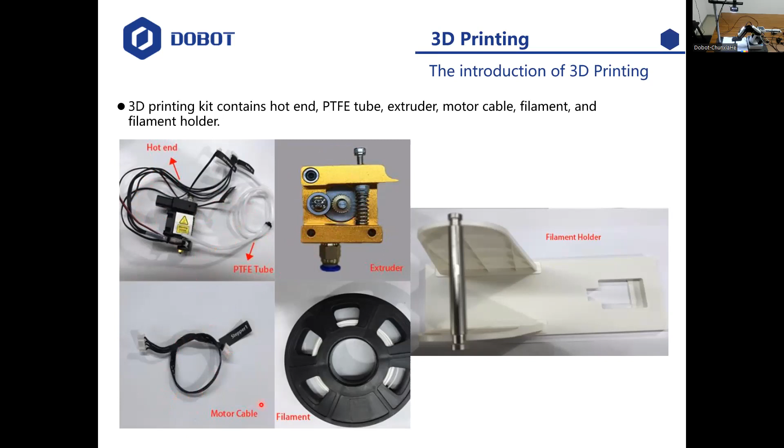This is the Hotend, and this is the PTFE tube, and this is the extruder and motor cable and filament, and this is a filament holder.

Then connect the end of the PTFE tube to the Hotend and push it down to the bottom of the Hotend, then connect the other end to the extruder.

Okay, and step 3 is to insert the filament into the PTFE tube and push it down to the bottom of the Hotend. So we can know this white cable is the PTFE tube, and this one is the Hotend.

And then to fix the Hotend on the Magician with the clamp fixing screw, and then insert the heating cable to interface 4, and the fan cable to interface 5, and the thermistor cable to interface 6.

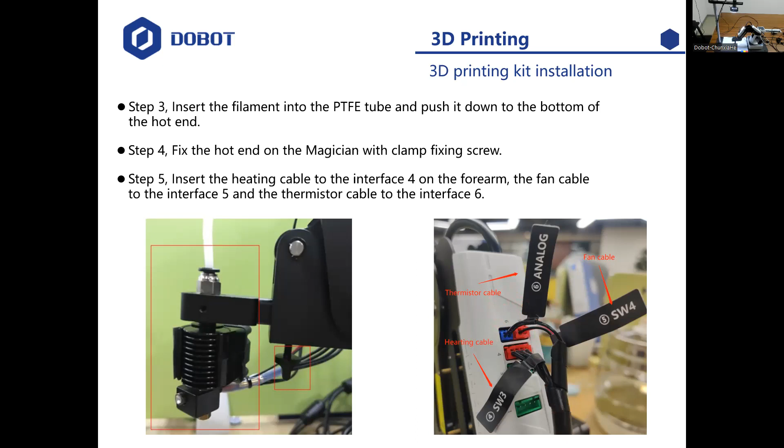Okay, and step 6 is to connect the extruder to the Stepper1 interface on the back of the base with the motor cable, then place the filament and extruder onto the filament holder. So we can know this is the filament holder and this is the extruder.

Okay, so next I will show you how to operate the software. This is the main page of DobotLab. In this page, users need to click the 3D printing lab.

When the user enters the 3D printing lab, they will see the following pop-up windows. Here are two suggestions: if you haven't yet burnt the 3D printing firmware, you need to click Onboard, and then select the device and port on the firmware upgrade page.

Then click Connect. After selecting the firmware type, click start to upgrade. But if the 3D printer firmware has already been burnt, you can directly open the 3D printing software to use it.

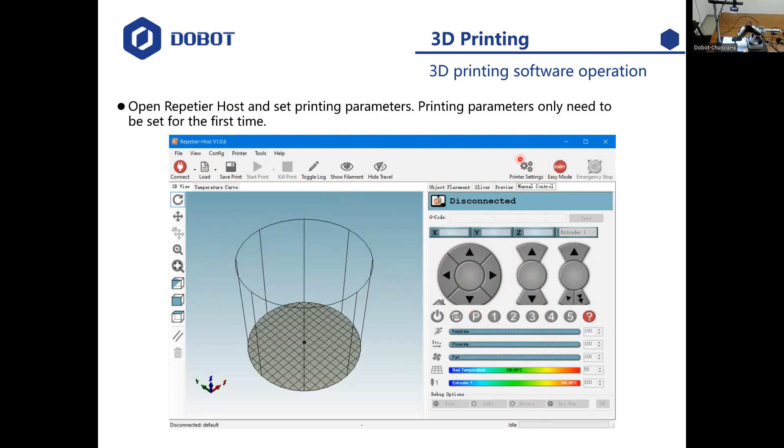Okay, and on this page, you need to unselect the options: disable motors after job/kill, go to park position after job/kill, and printer has SD card. Other values are set by default, so you don't need to change them.

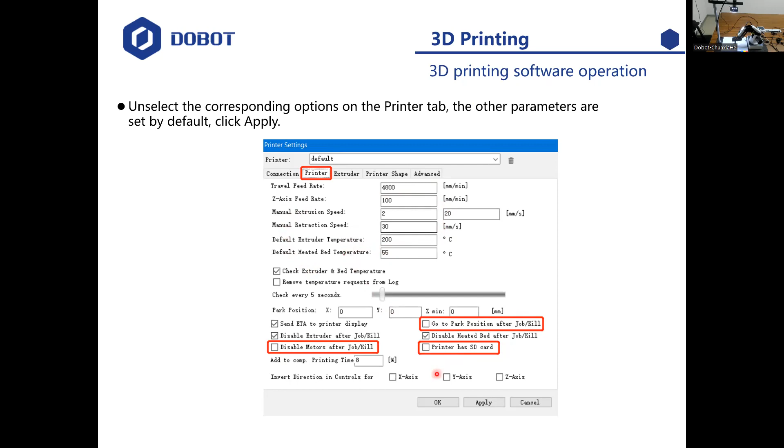So then apply and go to the next page. This is the extruder tab, and in this page you just need to set the diameter and then click apply.

Okay, and this is the printer setup page. You can set the printer type, the X, Y, Z axis, print radius, and the height. When you finish setting all the parameters, you need to click Apply and OK.

After setting the parameters, let's go back to the Repetier-Host page. Here you need to connect the Repetier-Host page to the machine by clicking this button. After the connection is successful, the current heating temperature will be shown in this picture.

Before printing, users need to test the extruder to check whether the melted filament flows from the nozzle. The temperature of the extruder will be above 170 degrees Celsius. The machine will not start 3D printing until the filament is in a melted state, so you need to heat the extruder first.

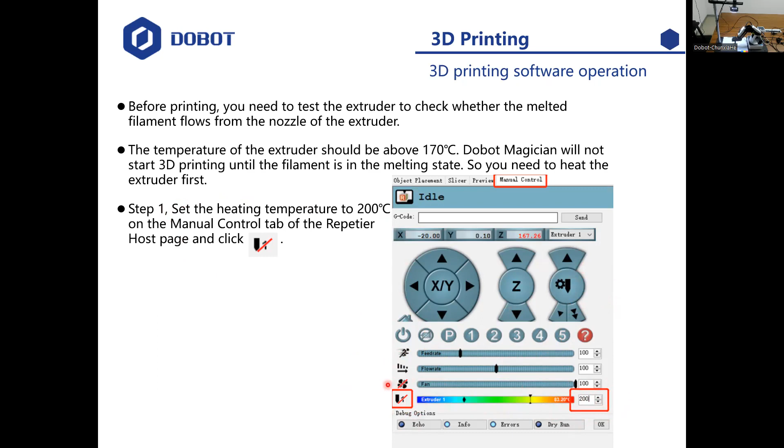Next, I will introduce how to heat the extruder. Step 1 is to set the temperature to 200 degrees Celsius on the manual control tab, then click this icon to start heating. Step 2 is to click the extruder feeder when the heating temperature is up to 200 degrees, and then feed up to 10 to 30 millimeters.

If the melted filament flows from the nozzle, the extruder is working properly.

Next, you need to adjust the printing space and get the printing coordinates. There are two ways to get the printing coordinates. The first is to press the unlock key on the robot arm and drag the robot to make the printing head contact the surface of the masking paper, then release the unlock key.

Then we need to input the command named M415 in the G-code command window and press enter to get the current coordinates. In the other way, you can also press the key button on the back of the base to get the current coordinate.

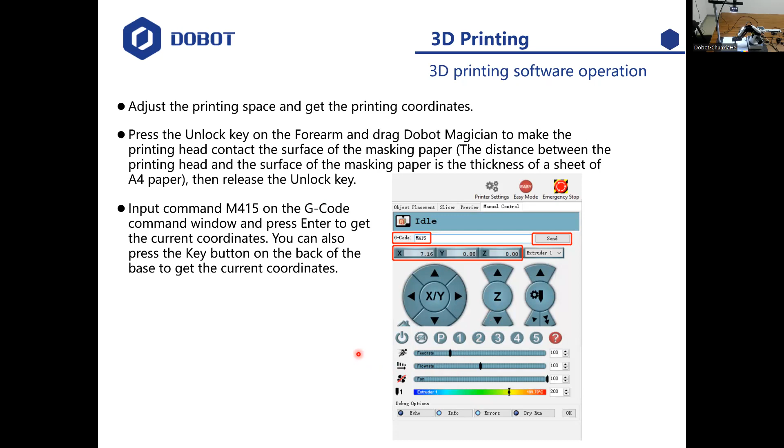If you can't find the G-code command, please click this green one to close the easy mode. The icon changes from green to red, indicating successful closure.

Okay, and then we need to import the prepared 3D printing model you saved on your local file, like this picture.

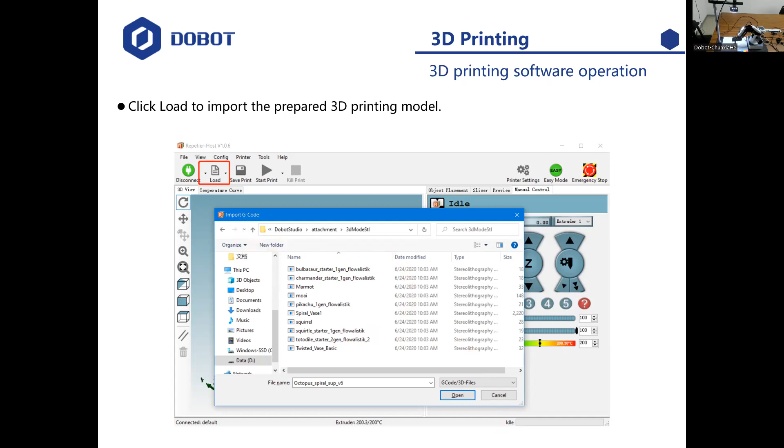After importing the model, you can change the size of the model. For example, you can center, zoom, or rotate the models on the object placement page.

Then we need to set the slicing parameters and the slice style. We can click the Features configuration to set the slicer on this page. When we enter the configuration, we can see this page.

We can see some of the parameters about the slice, and select the slicing parameters on this page. Then we save the printing settings, the filament settings, and the printer settings.

After saving the parameters, just click Slice with CuraEngine on this page to complete the slicing.

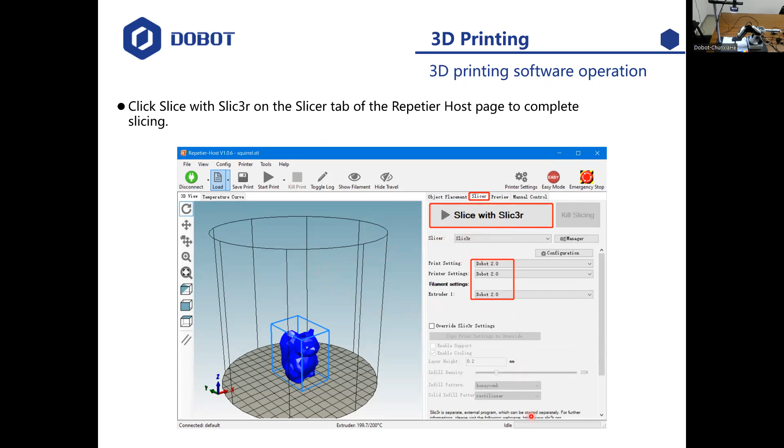Next, I will show you a real demo about the 3D printing. Just hold a moment.

Okay, now sharing a screen about the 3D printing video. Here are some materials for the 3D printing kit.

At first, when we start to prepare the materials, we need to pull the filament down to the bottom of the hole via the pulley.

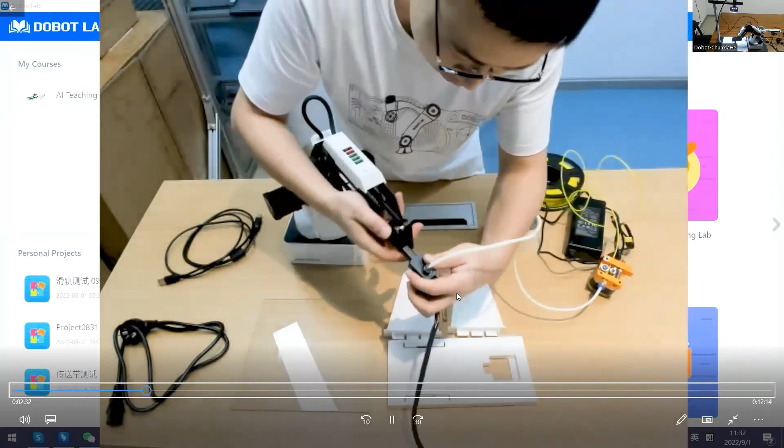Then fix the quadrant in position with the clamp fitting screw.

Then insert the cable into the interface on the robot forearm.

Then place the extruder on the filament holder. But before that, we need to assemble the filament holder like this.

Then we need to connect the extruder to the robot's Stepper 1 interface on the base of the robot.

Then connect the USB to the computer and connect the adapter to the machine.

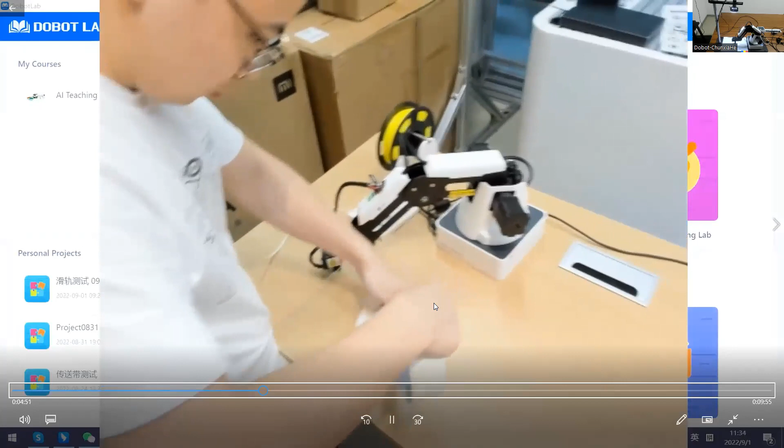Then we need to stick the tabs on the glass, like this movement, because we need to put the 3D printing model on this glass.

Sometimes the firmware upgrading will take a few minutes, so just wait.

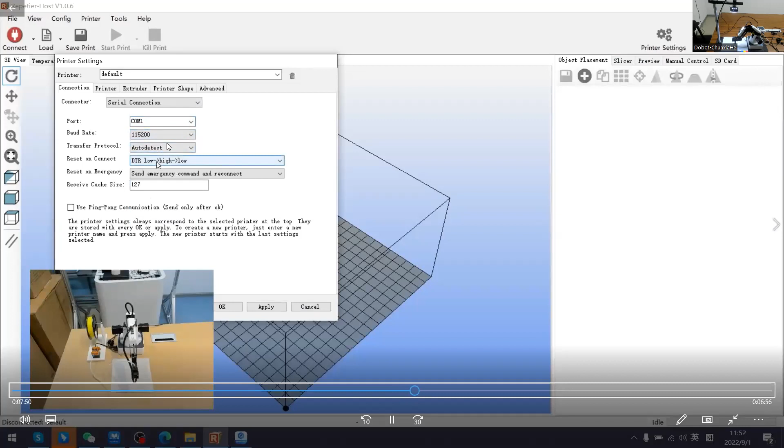In this printer settings page, we just select these 3 options and then go to extruder. In this extruder page, we need to set the diameter. In this page we also set home X, Y, Z axis, and some printing ratios.

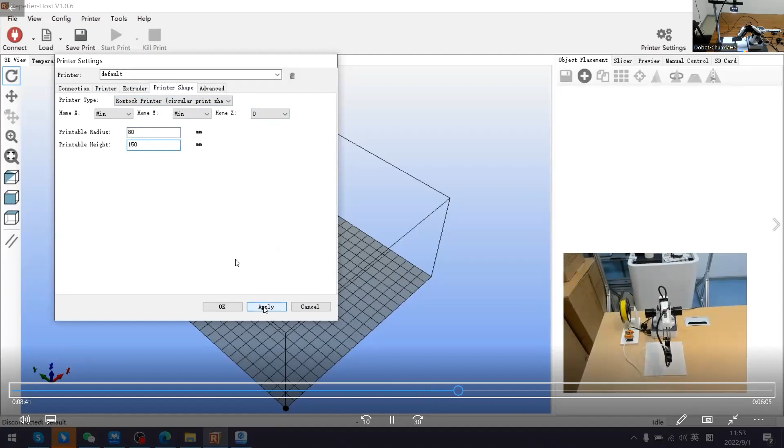Okay, click apply, and then connect to this software, but sometimes an error like this will occur.

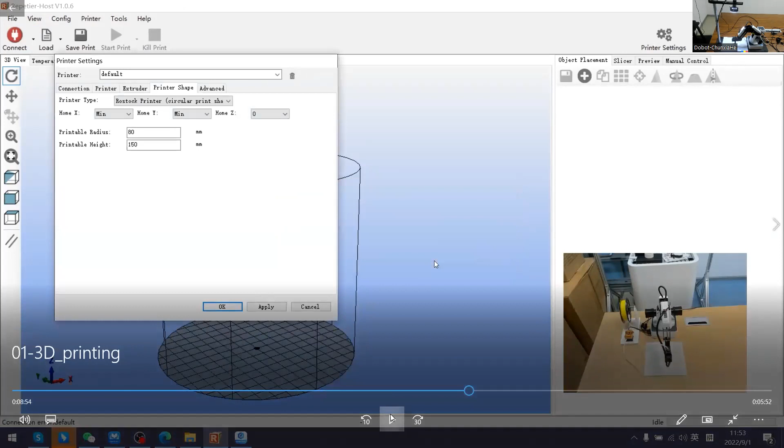In this case, we should open the Repetier printer settings, go to the connection settings once again, and change it to the machine port. Then connect it once again.

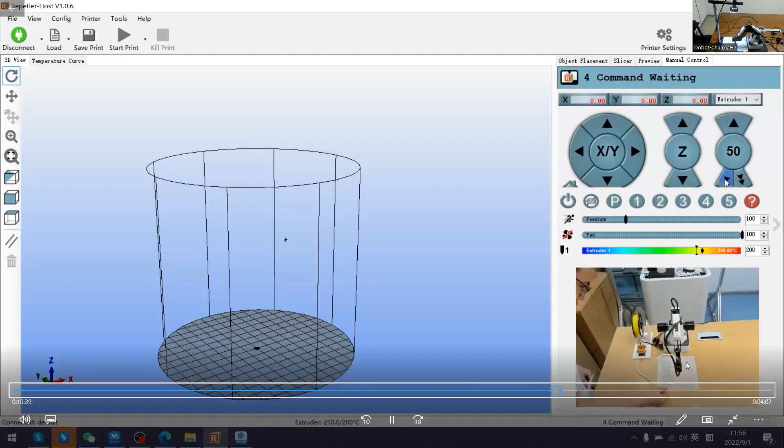Now the temperature is up to 200 degrees. Next we are about to click the feeder and let the melted filament flow from the nozzle of the extruder. We can see from this video that the extruder is working properly.

Next, we are about to get the coordinates. We just need to input the command M415, and the G code to save this coordinate.

Okay, then we're about to import the 3D printing model saved in your local file. When we open the model, we can change the size, for example to center it, by clicking on the icon.

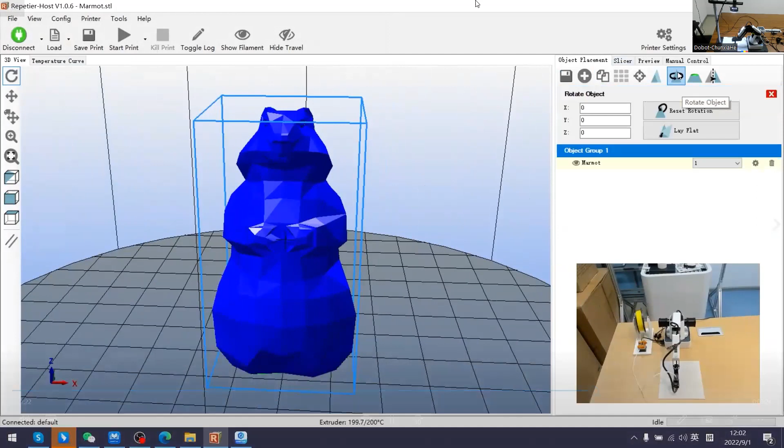Next we are going to click the configuration icon to set the parameters on the slicing, the second page.

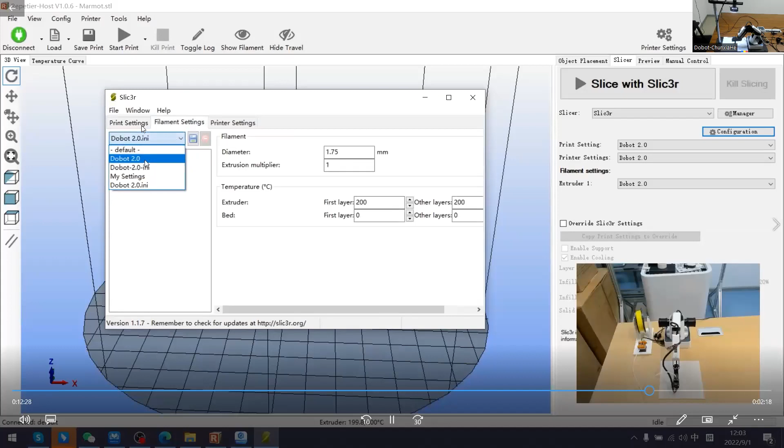Okay, so we set the Dobot 2.0 in each of the print settings, filament settings, and printer settings. Because today I'm printing a filling model, I choose the Dobot 2.0. Okay, and then save them.

So next we will start to print the 3D model.

Okay, we can see from the screen that the machine started to move and work. Like this, the machine started to print the 3D model on this platform.

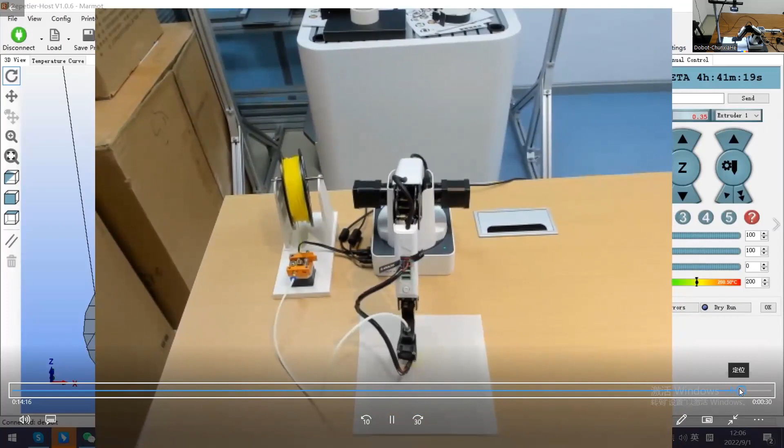Okay, we can get the image on the Repetier-Host to know in real time about the printing model. Okay, thank you very much.

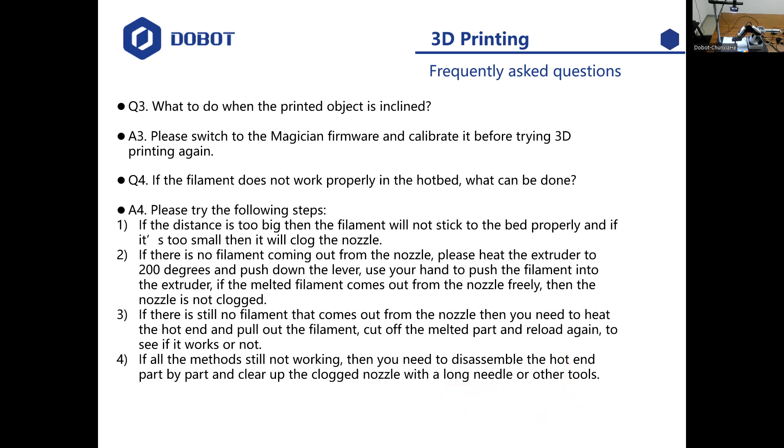Next I will introduce laser engraving. I will skip this video as well. To operate the laser engraving, you just need the laser kit.

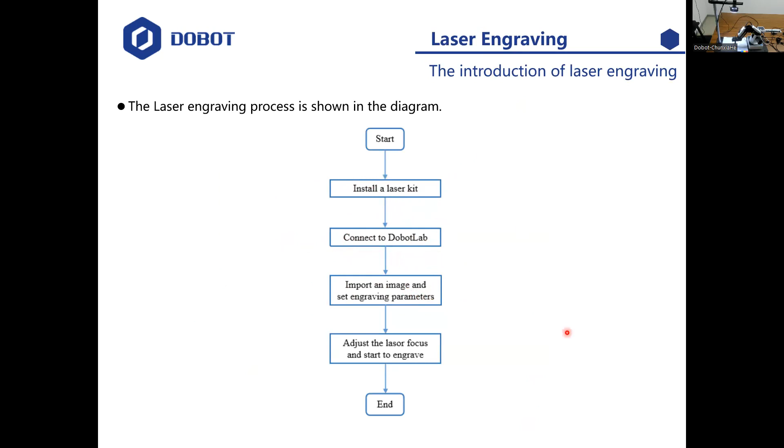This is the laser kit process figure. When we start, we need to install the laser kit, connect it to the DobotLab, import a picture, set the engraving parameters, adjust the laser focus, and start to engrave.

Next, place a piece of brown paper on the work face within the workspace of the Dobot Magician.

Next I will show you how to operate the software. This is the main page of our DobotLab. Users can click the laser engraving lab.

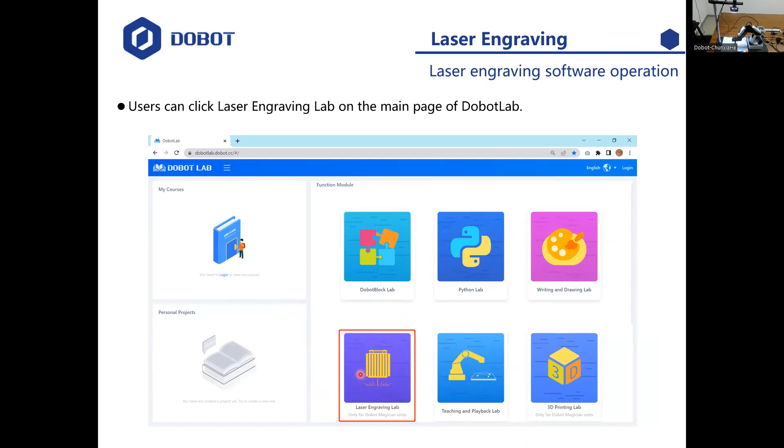When we enter this lab, users can click the drop-down list on the device connection panel to connect the machine with the software. Then click open to import an image or picture from a local file saved on your computer.

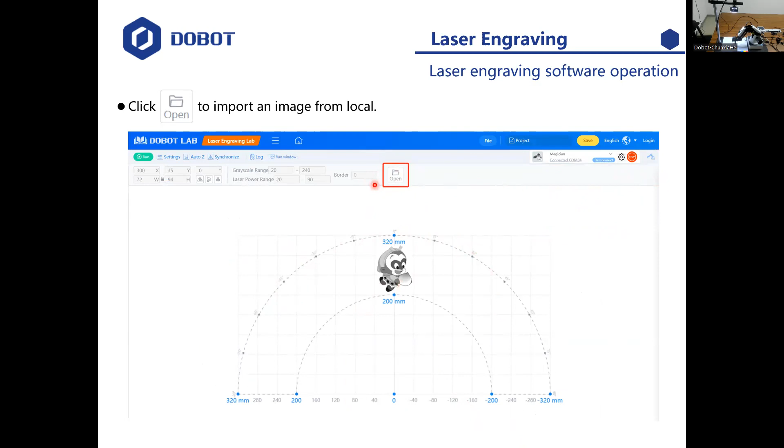Then you can drag the picture to change its size and position, and you can also rotate the angle or flip the mode of this picture. The picture in the drawing area should be placed within this area.

Then click home in this panel to let the robot go to the home position, then select the laser as the end effector in this control panel, and click open after the engraving. The laser kit will emit the laser, and you can adjust the laser power range.

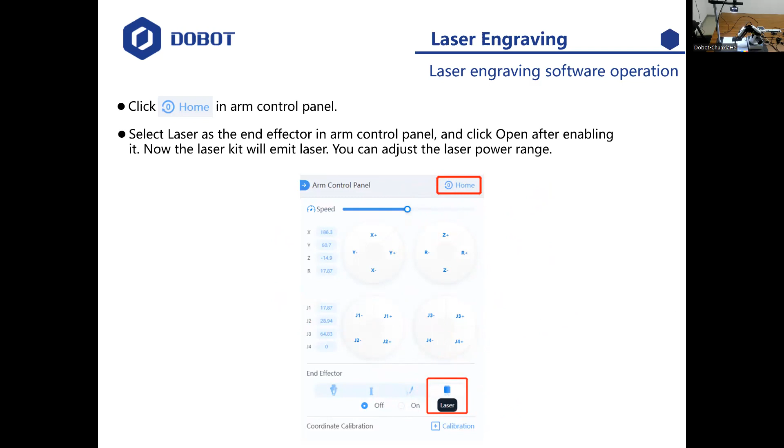Then click Alt Z to obtain and save the current value of the coordinates, and click synchronize to move the laser kit over the starting point of the engraving.

Next, click the run button to let the machine start to engrave. Now we can see on the screen the cursor shows the position of the laser in real time, and the running process can be displayed below the engraving area.

This is the running area. You can click pause or stop to control the engraving process. Next I will show you a demo about laser engraving.

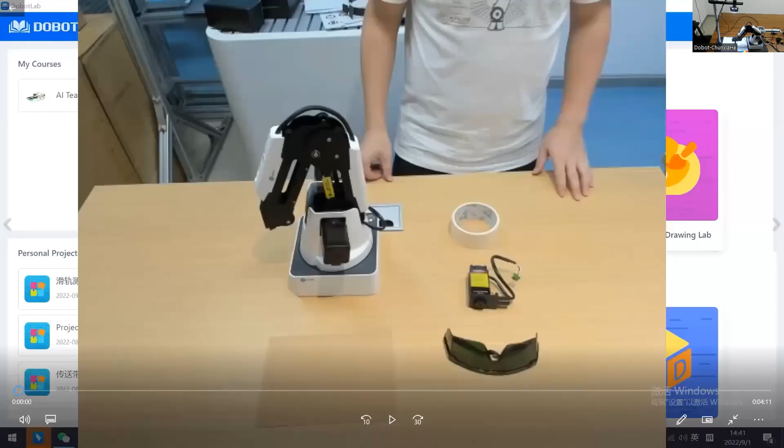Okay, to operate the laser engraving, we just need a laser kit, tape, goggles, and brown paper. First, to fasten the laser kit to the end of the Dobot Magician.

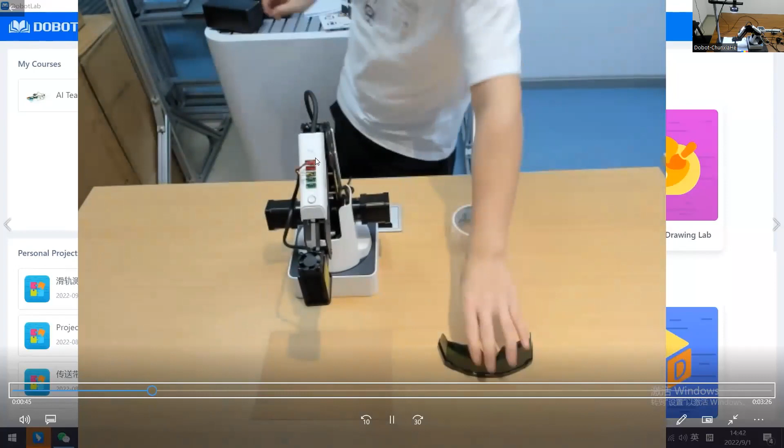Then connect the laser kit with the laser cable to the robot. The users must wear goggles to protect our eyes, and then stick the tape to the brown paper to fasten it.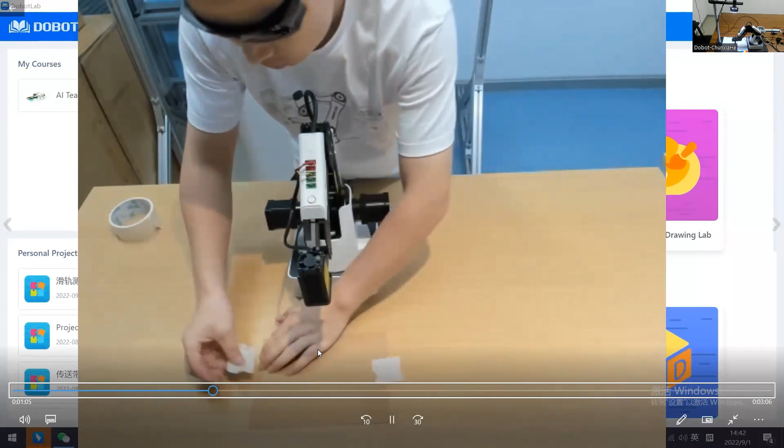Next we are about to operate the software. So this is the main page of the DobotLab. We may open the DobotLab and enter the laser engraving lab to connect the Magician with the software, and then import pictures.

Click open to import the pictures, then change the size of this picture, and make it centered in this area.

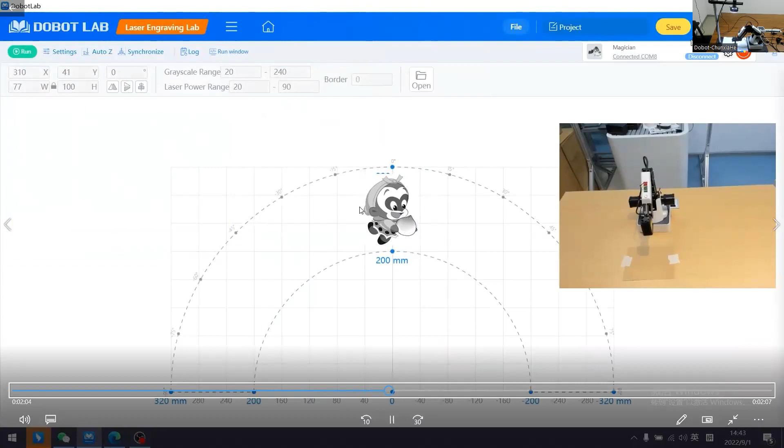Then click the home button to make the robot arm move to the zero position. We can see from this video the robot arm started to move to the zero position.

Then select the laser as an effector and turn on the laser. Now the laser kit will emit the laser. Users can adjust the laser power range and focus the lens, like this.

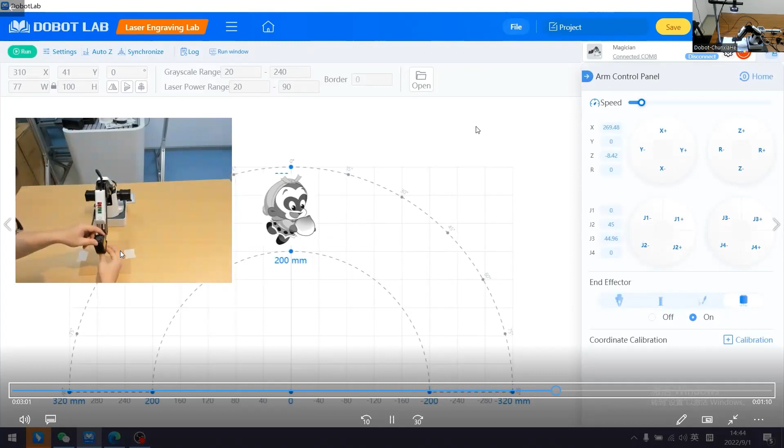We can adjust the laser engraving speed, then click run to start the laser engraving. We can see the running process in this area.

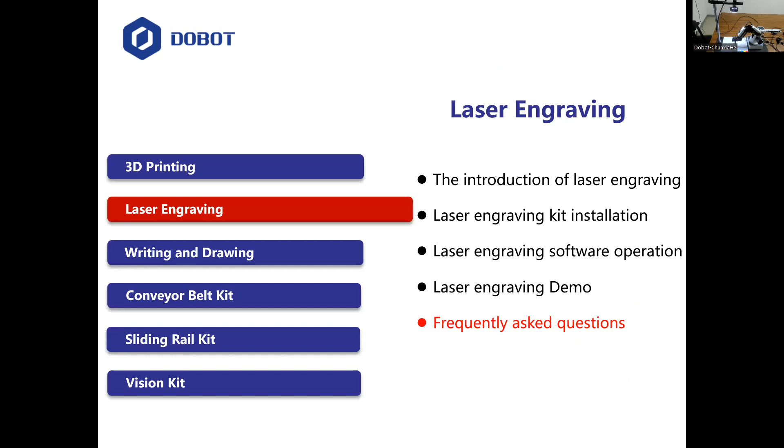Next I will share some frequently asked questions with you. Question number one: if the laser module cannot burn the paper at first, what can be done?

In this case, please try the following steps. First, check whether the connection of laser is right, and then check whether the laser can be focused.

If the laser is always unable to focus, it may be that the focus length of the laser is too long. You can try to focus by turning the knob on the bottom of the laser, turning this button to change and adjust.

Number three, you can check whether the material has high reflectivity. Please change to a brown paper to check the problem.

If all the previous ways fail, the laser may be malfunctioning. In this case, please change to another laser to test.

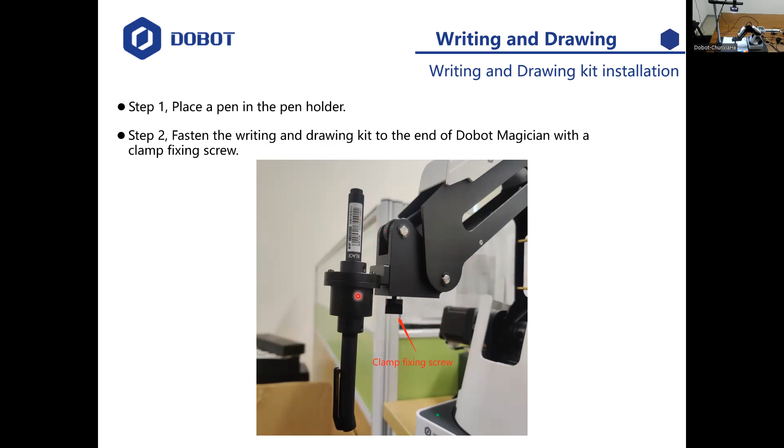Next I will show you how to install the writing and drawing kit. Step 1, place a pen in the pen holder. Then fasten the writing and drawing kit to the end of the Dobot Magician with a clamp fixing screw.

Step 3 is to place a sheet of paper on the work surface within the workspace of the Dobot Magician.

Next is how to operate the writing and drawing software. When we open the DobotLab, we can click the writing and drawing module, then click connect to let the machine connect with the software.

Before the machine starts to write and draw, you need to import a picture from a local file or type the text in the typing area, then click add.

So the picture appears in the drawing area like this. As an example, we type 'Dobot', and we can see it in this area.

If you need to insert a picture, click open to select a picture from the local file you saved. If the image format is not SVG...

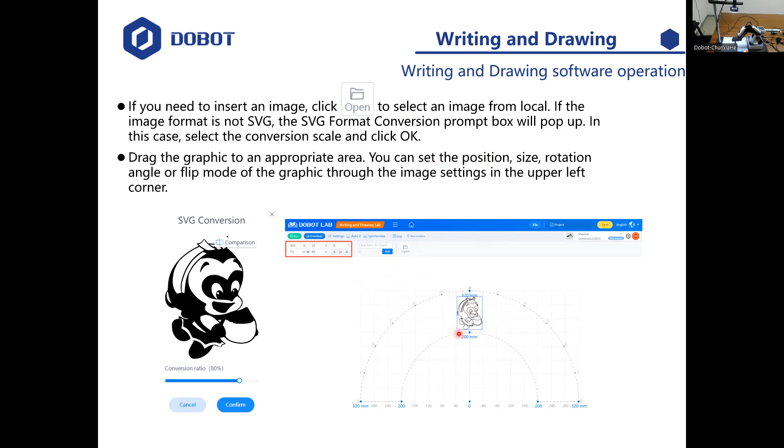Okay, and then click the settings to set the pen lift, the lifting height and the descent height and the speed. Generally, the pen lifting height and descent height are set to 20 by default.

Next, users just need to click home and then select the pen as an effector in the arm control panel.

Next, we need to adjust the Magician position and get the current Z coordinate. Please press and hold the unlock button on the forearm to move the Magician to lower the pen nib until it squeezes the paper.

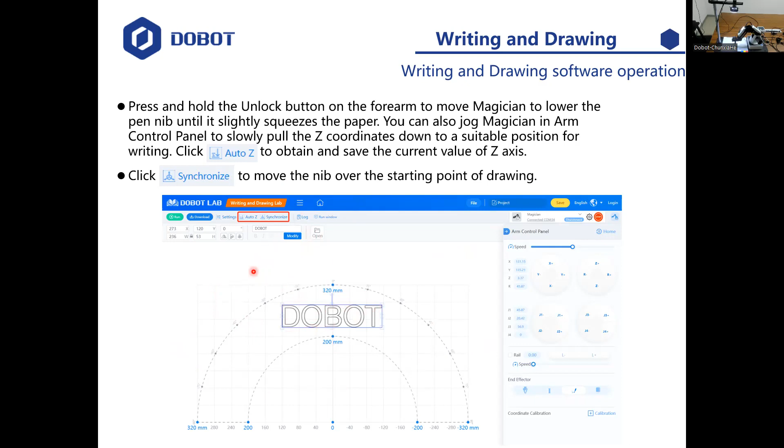You can also jog the Magician in the arm control to pull the Z coordinates down to a suitable position for writing, then click Auto Z to obtain and save the current value of the Z axis, and click the synchronize icon to move the nib over the starting point of the drawing.

Okay, and click run to start drawing the picture. We can see the running process in this area, and you can also click pause or stop to pause or stop the drawing.

You can also click the download icon to download the file to the device. Next I will show you the demo about the writing and drawing.

I shared my screen about this video. This video is about writing and drawing. We just need a pen holder and tape to do it. At first, we need to fasten the pen holder to the end of the device. It's very simple.

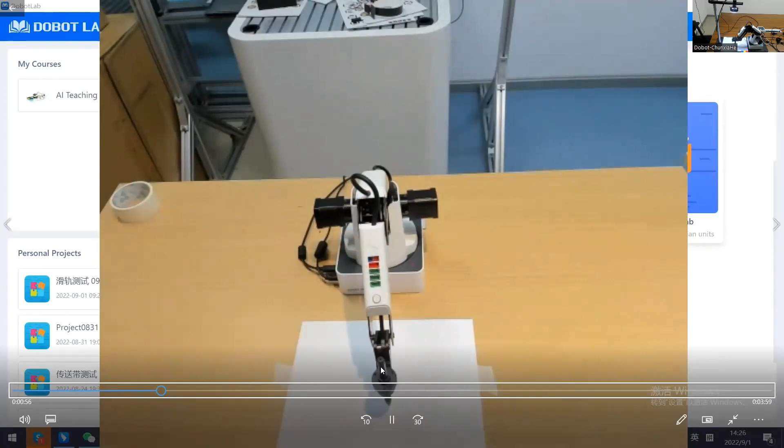Okay, and then stick the tape to the white paper to fasten it. Then we need to open DobotLab, and enter the writing and drawing module to enter this page.

Next we are going to go back to this page, and then enter the text in the rectangle box, in this area.

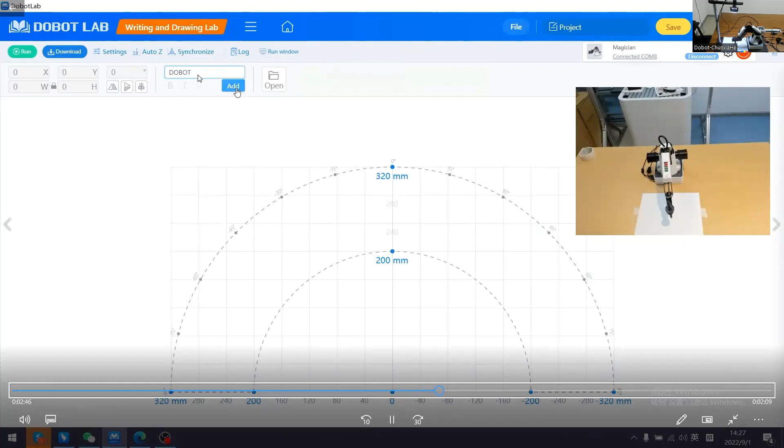For example, we type DoBot. So when we click Add, the DoBot image appears in this area, and we can change the size of it.

And then click arm control, and then set the pen lifting height and descending height.

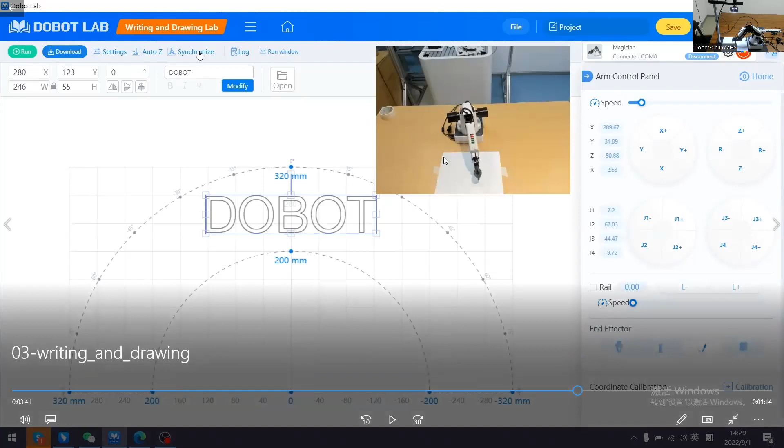Okay, now we are going back. So now we are going to get the Z coordinates and save the axis values. We can press and hold the unlock button to move the robot to lower the pen nib until it slightly touches the paper.

And then click Synchronize and Auto Z to get the Z coordinates and save the Z axis value.

So if we click run, the robot will start to work and write the image in this area. We can see the running process in this area.

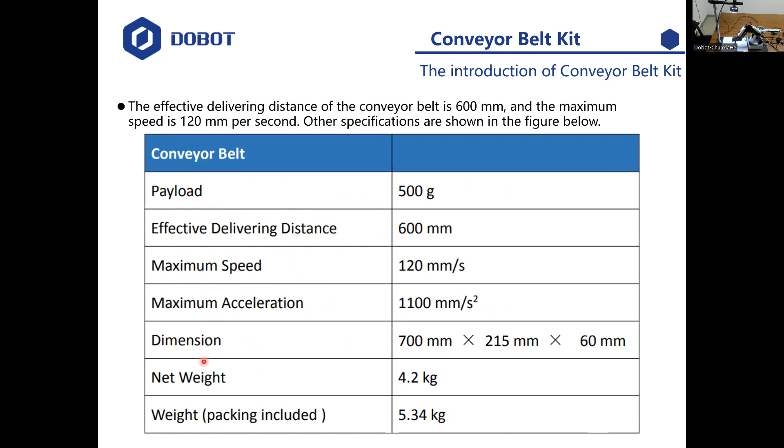Next I will show you how to install the conveyor belt kit.

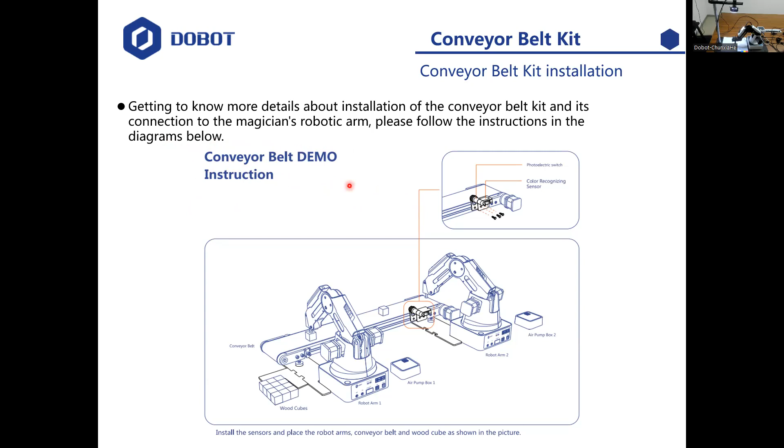In this part, if you want to use two robot arms to operate the conveyor belt kit, please follow the instructions in the pictures below. But in today's training, we will only use one robot arm.

Regarding the connection, please connect the motor cable of the conveyor belt to the Stepper1 interface, then connect the color sensor cable to the robot's GP2 interface, and connect the photoelectrical sensor to the robot arm's GP4 interface. The connection method is shown in this picture.

The following figures give some instructions for using the color sensor and the photoelectrical sensors. I want to show some of the differences between the different versions. This is the color recognition sensor instructions.

This is about the photoelectrical switch instructions.

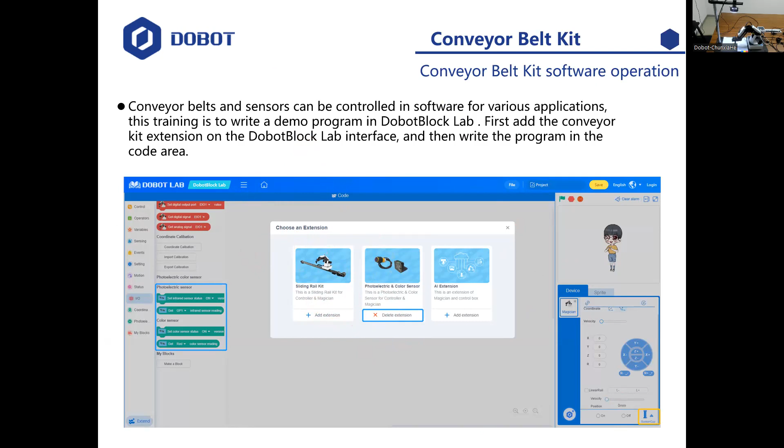We write the following sample program, then we can set the parameters in each function, such as the conveyor motor speed, and set the status of the infrared sensor.

Then we run this program. The Magician and the conveyor belt work together to transport different objects from one location to another location.

Next I will show you a real demo about the conveyor belt kit.

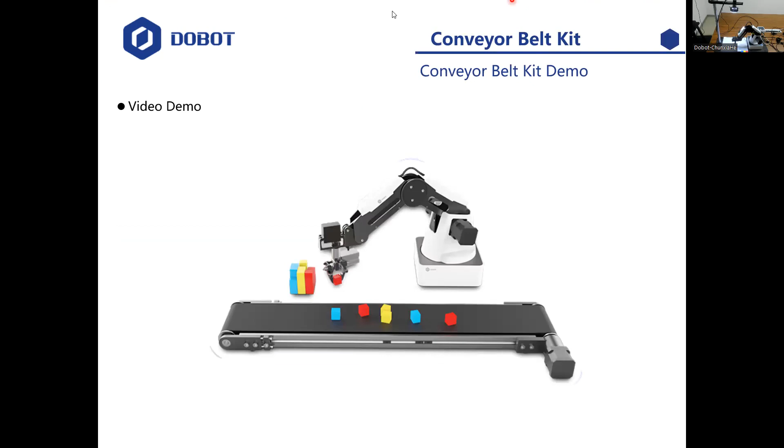Now I've shared a screen about this video, the conveyor kit for this training. We can see some of the conveyor kit accessories on this table.

So at first, we need to fasten it. First, fasten the photoelectric sensor. This is the photoelectric sensor, so we need to fasten this to the robot arm.

And this is the color sensor, so we fasten the color sensor to the conveyor.

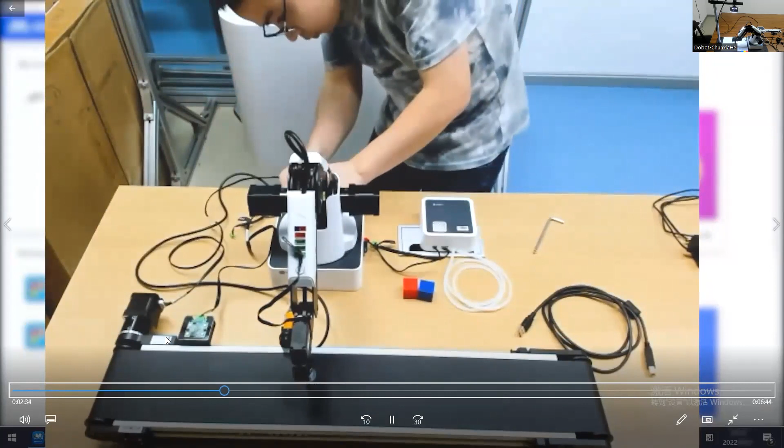This is to connect the cable from the conveyor kit with the robot. And this is the USB cable, so we connect the USB cable with the computer.

And then fasten the air pump box to the machine, and connect the pump box cable to the machine's forearm.

Insert the power adapter into the power cable, then connect the electric source and the power to the robot.

Next we're going to enter the DobotBlock Lab. At first we need to connect the machine with the port combined.

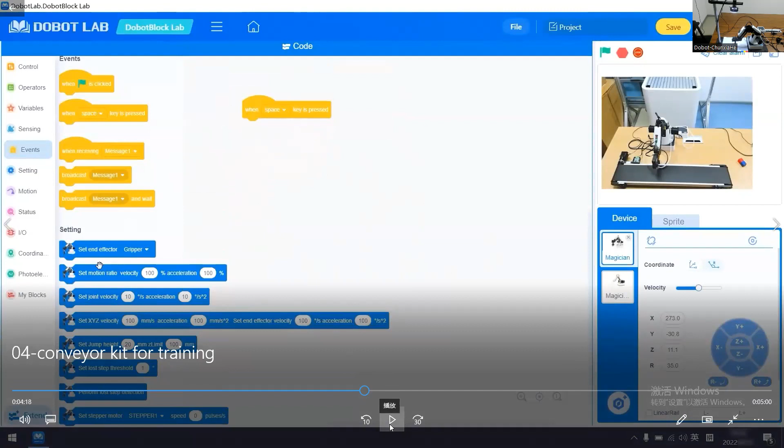Then we set the margins, the motion ratios, the velocity, and the jump height. Then we set the sensor, the infrared sensor and color sensor status and version.

This is about setting the conveyor to motor stepper, so stepper is set to stepper 1.

Second, we need to repeat the forever loop function. This is about the loop function, so we need to wait 1 second.

Then the if condition function: we will set the if condition which gives the infrared sensor state and conveyor motor state.

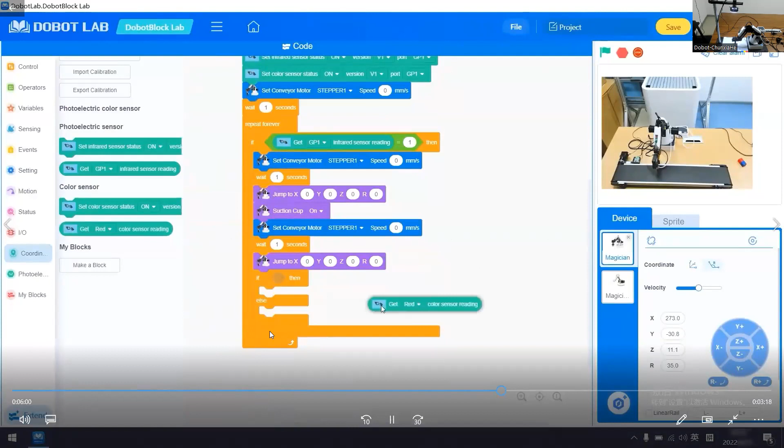So this is the if-else condition function. When we type the structure of this program, we need to set some of the parameters and values. Here are some values about the height value and the port count, and some x, y, z axis values, and then the wait time and the speed.

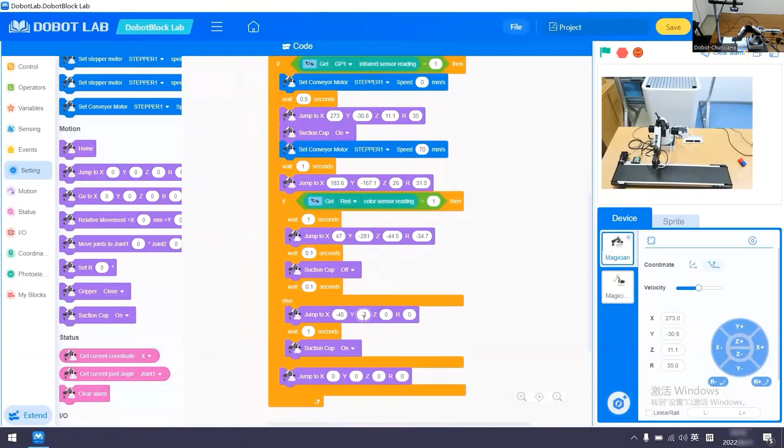Okay, so this video is about the Magician, and the conveyor belt working together to transport objects of different colors from one location to another location. Okay, thank you very much.

Okay, so next I will share some review about the FAQs. First, question 1: how to know the version of the photoelectric sensor and the color sensor? Here, this is the label on the sensor with the version written on it as shown in this picture. So we can know the version is 2 and the series number is this.

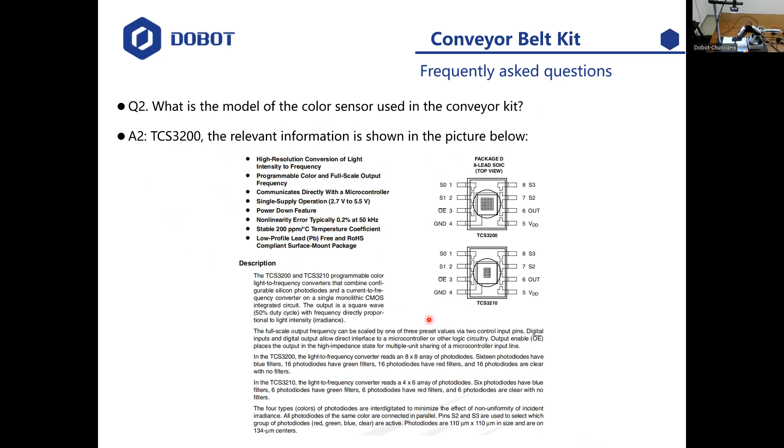Okay, and this is question 3: when the object is in front of the photoelectric sensor, but the photoelectric sensor can't detect the object, how do you solve it? You can rotate the button on the back of the photo sensor to adjust its sensing distance. So you rotate this button, and clockwise means to make the distance longer, and counterclockwise means to shorten the distance.

Okay, this is question 4: the conveyor belt color sensor doesn't work properly - what are the possible reasons? You can try to analyze the following reasons and try these steps. Number 1 is to check whether the current firmware and software versions support the color sensor.

Next, number 2 is to check the distance between the color sensor and the object - it should not be too long or too short, within the range of 5 to 10 millimeters. And then check whether the color sensor interface is consistent with the actual interface.

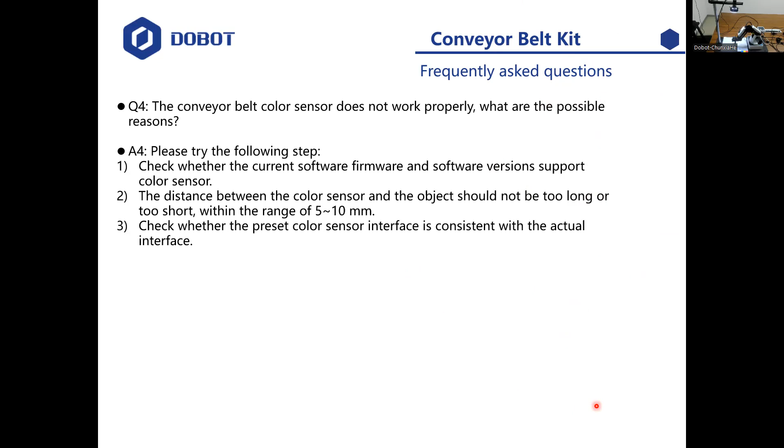Okay, if no questions, I'm going to move on to the next part. This part is the sliding rail kit. At first, I will show some of the materials about the sliding rail kit - here are the sliding rail, the tool cage, the wire seat, the attachments, and some assembling instructions.

Okay, and here is shown a specification about the sliding rail kit. We can know from these specifications, for example, payload is 5 kilograms and effective travel distance is 1000 millimeters, or the maximum speed and maximum acceleration, and some distances or this sliding rail kit's weight.

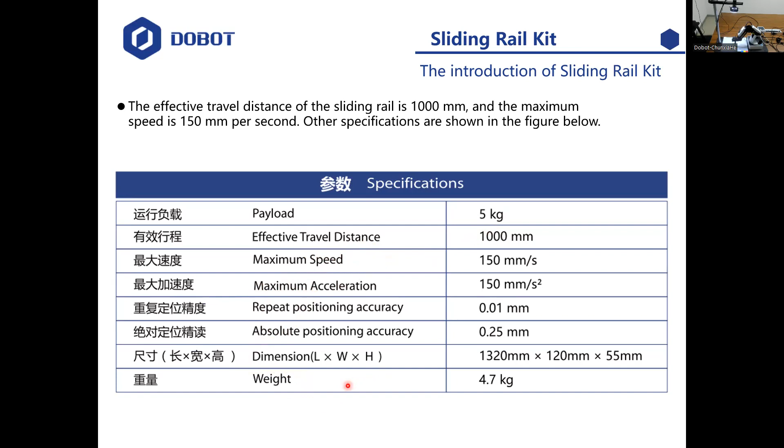Okay, next I will show you how to install the sliding rail kit. At first, the users need to mount the robot arm with plate A, and then fix plate A with plate B using 3 screws. Then fix the holders of the cable to plate A, and connect the cable to the holder, like this in these pictures. Then connect the cable to the robot.

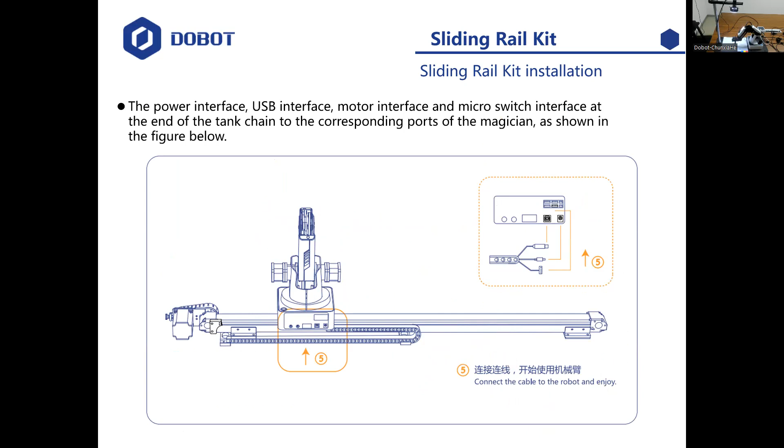So in this case, I hope you can note that if an additional air pump box is to be used for handy applications, plate C can be used. In this case, use the 2 screws to attach plate C to plate A from the bottom, and then fix the air pump box to plate C.

Okay, next I will show you some operations of this software.

So you need to, but at first, when we enter this DobotBlock Lab, you need to add the sliding rail kit extension on the DobotBlock Lab interface and write a program in the code area. During the process of writing a program, you can view help documents such as the DobotLab programming manual.

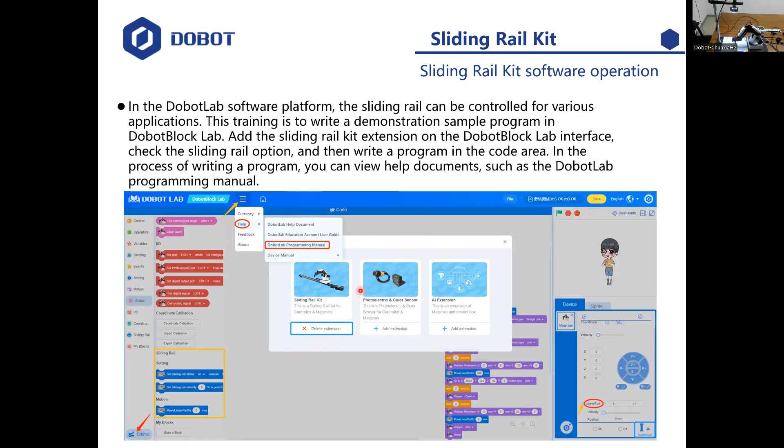So you can refer to this when typing a program. This is an example program to make the machine move on a slide, moving a small object from one location to another. When we type the program, we need to set some parameters, for example the speed, the sensor motors, or the coordinate points.

Okay, so I will show you them about the sliding rail kit.

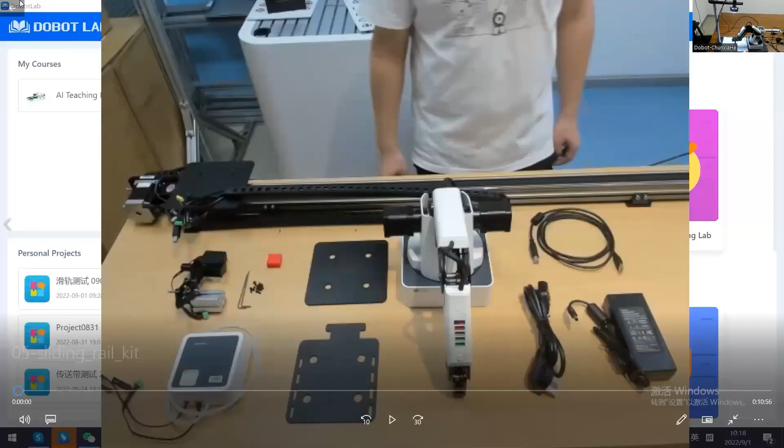So in this video, here are some of the sliding rail kit materials. It's the machine, the plate A and B, and the air pumps. And this is a gripper.

So at first, we need to mount the robot with the plate A, B, and then fasten the machine to the slide rail.

Next we are about to fix the gripper to the robot forearm. This is the electrical gripper.

And then connect the cable to the robot interface, and then connect the rail kit cable to the machine interface.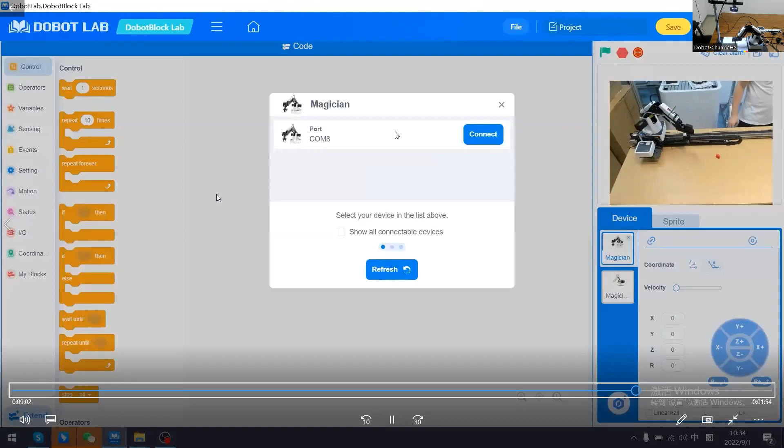Okay, so next is the software operation. Enter the DobotBlock Lab and connect the Magician, and then add the sliding rail kit extension. In this training we will upload from the local file I saved.

And then we can now list the program port. Okay, and then to connect the Magician and to check the rail.

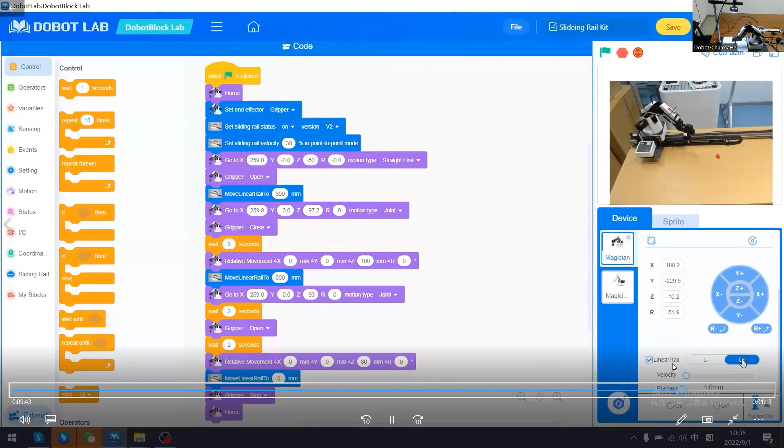So we can check whether the sliding rail is working properly by selecting the rail and checking the L-minus or L-plus button. We can now see from this video the robot starts to move, which means the sliding rail kit is working properly. And this video shows the Magician moving a small object from one location to another.

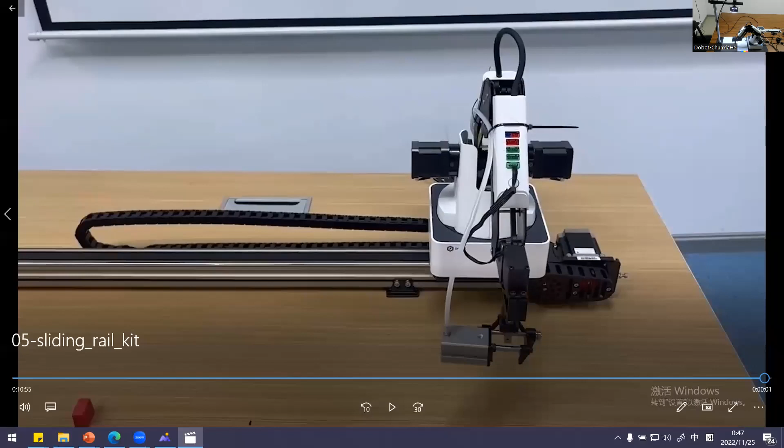In this case, after performing the zero return operation, if the sliding rail is in an abnormal zero return position, you can control its movement through the L-minus or L-plus button on the DobotBlock Lab interface to move it to the zero position.

And then, during the use of the sliding rail, if there is an abnormality at zero, which directions can generally be used for troubleshooting? So at first, we need to check if the wire connection is correct or not.

So I mean, the motor wire must be correctly connected to the stepper 2 interface and the motor wire interface, and check whether the limit switch interface is already loose.

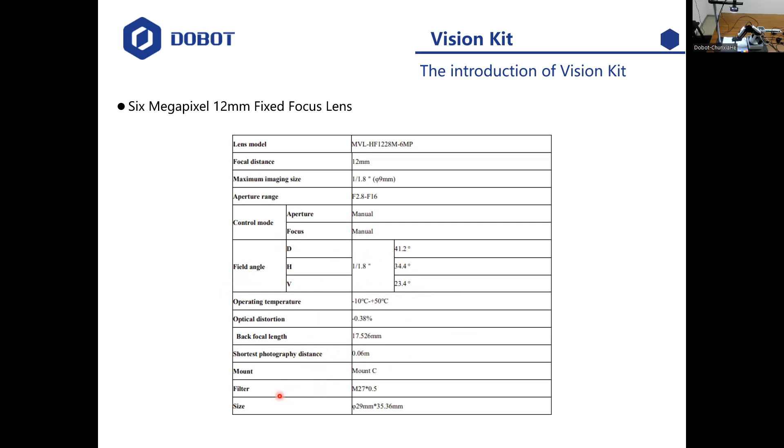Okay, and next I will show you how to install a vision kit.

So to install the vision kit, at first we need to fix the flange support of the extension port to the bottom, and then to fix the extension port to the camera plate, and then to assemble the camera support 1 and camera support 2, and mount camera support 1 on the extension port. Next is step 5: fix the camera to the camera mounting plate. Step 6 is to fix the camera mounting plate to camera support 2, and the last step is to mount the light source and the camera.

Okay, so after assembling the vision kit, we connect the light source to the machine. To get more details, we first connect the Magician light source switch to the power cable or the power adapter of this robot, then connect the light source switch to the power interface of the Dobot Magician, and then connect the Magician light source switch cable to the light source cable.

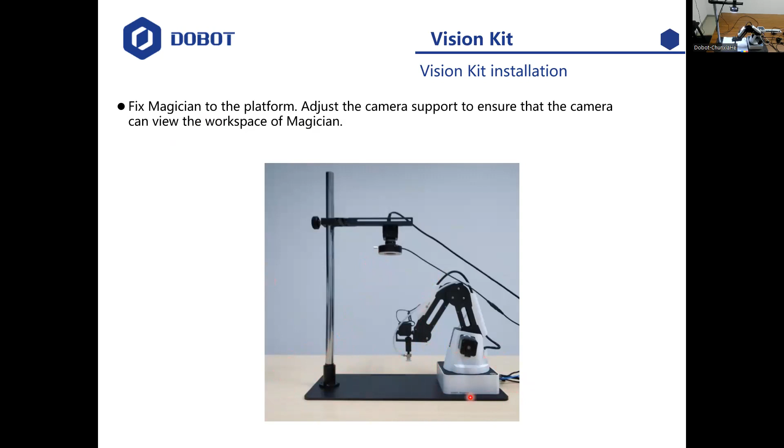Okay, so this is about the software operation. The Dobot Vision Studio software integrates various algorithm contents of machine vision, so it's very suitable for a variety of application scenarios. Through the Dobot Vision Studio software, the user can detect distance, detect metal and medicine or bottles, measure diameter, or match rectangles and circles.

And this is the main page of Dobot Vision Studio. Here are 4 modules that can be chosen: first is the general solution, then location, measurement and defect detection, and recognitions. This general solution includes 3 later modules. You can choose a module according to the type, or you can open a recent solution you created in Dobot Vision Studio before.

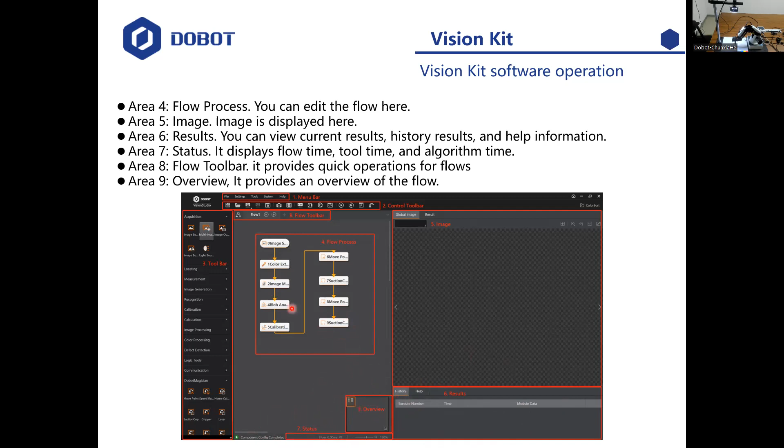So if you want to create a new flow, you can drag the tool to the process editing area to create a new flow, and then double click the module to set the parameters in this page.

Next I will introduce the important parts of the vision kit operations. So it's calibration. The calibration is used to determine the conversion relations between the camera coordinate system and the robot arm coordinate system.

For the operations, first we need to connect the magician to the computer via the USB cable, connect the camera to the computer via the USB cable, plug the dongle into the computer, and then open the general solution.

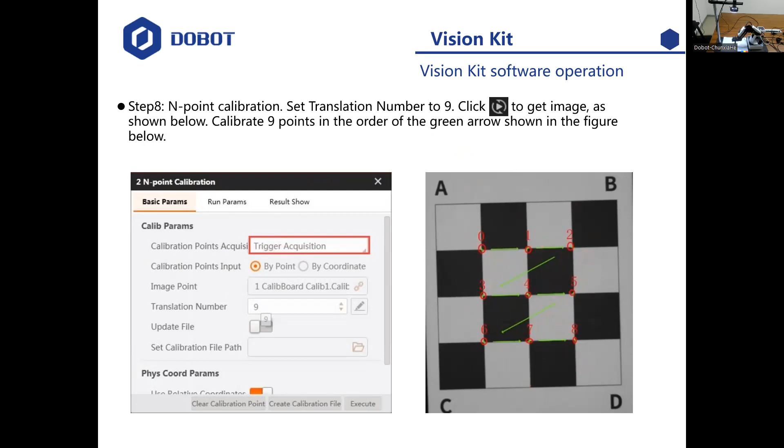Then click the robot arm icon on the toolbar to open the Dobot Studio, choose the magician, and click connect. Set the pen at the end effector of the magician.

You can move the robot by clicking the X or Y axis. Next, jog the X-Y axis on the Dobot Studio to make the pen move to the 9 points in the order of the green arrow, and then write down the point value for each ID.

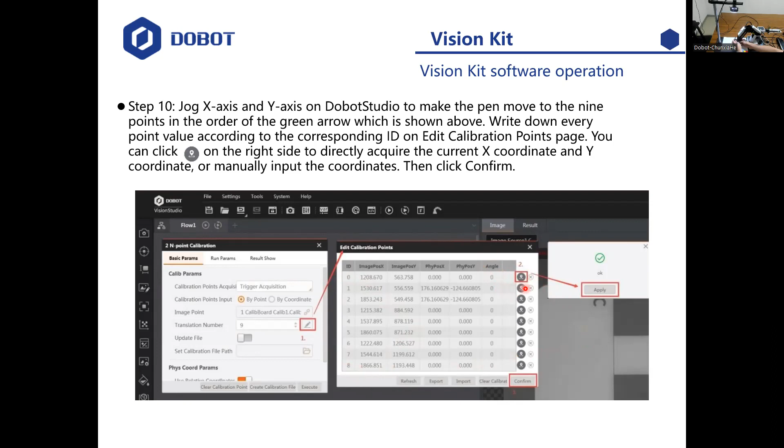There are 9 IDs from ID 0 to ID 8. Then click the locations icon to get the coordinate, to get the current XY coordinate or manually input the coordinate, and then click confirm.

Okay, this is step 11. You just need to click the create calibration file to save the calibration file. This calibration file will be used in the following demos. Please note the relative position between the camera and the magician cannot be changed, otherwise you must create the calibration file once again.

Next I will show you a Vision Kit demo. In today's training demo, we are about to detect the colors of those blocks and sort them. To do these operations, we need to do 3 steps. First, we need to extract the colors in the camera image and sort the corresponding blocks according to the color.

Then, get the calibration file to convert the image coordinate to the coordinate according to the calibration file, and then sort the color blocks by the Dobot Magician. Because this part is most important and difficult, next we're about to show how to operate these demos. I will share my screen about the real operation.

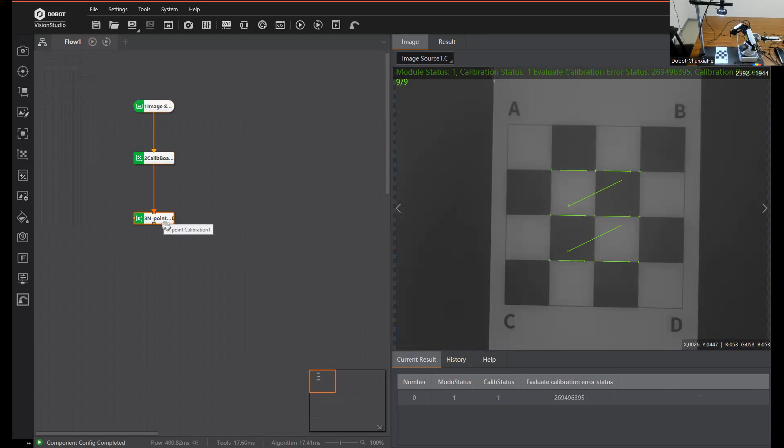So we can get some of the images in the image source area. Now we're about to get the 9 points. We need to clear the calibration file and create a new calibration point. We can click execute to get the new calibration image error.

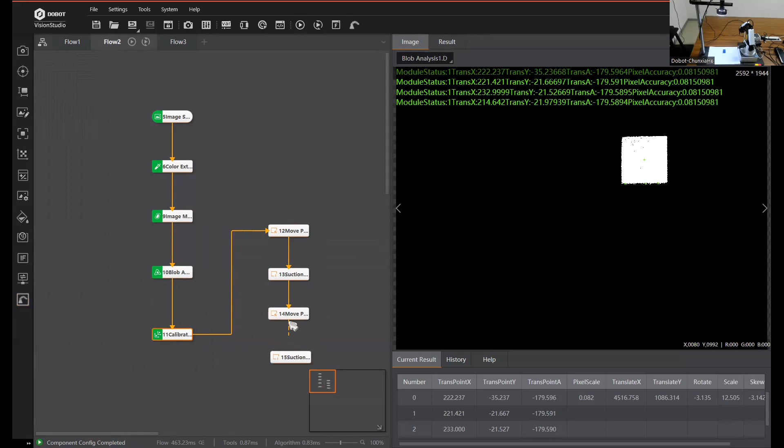So in move points, we need to set the XY coordinates, the output point, the TransPointX, Y, and output the TransPointY.

And this is to set the move mode, so we set it to jump. And to turn on the run parameter.

Okay, and to set the move point coordinate.